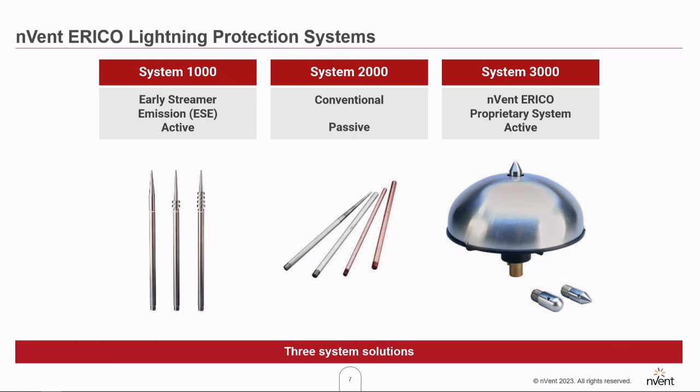Going further, I think I will start with system 2000, because this is the basic installation for lightning protection. It's the installation that we can see all over the world. Everywhere we can see buildings with air terminals on every corner of the building, with down conductors that are going down across the walls.

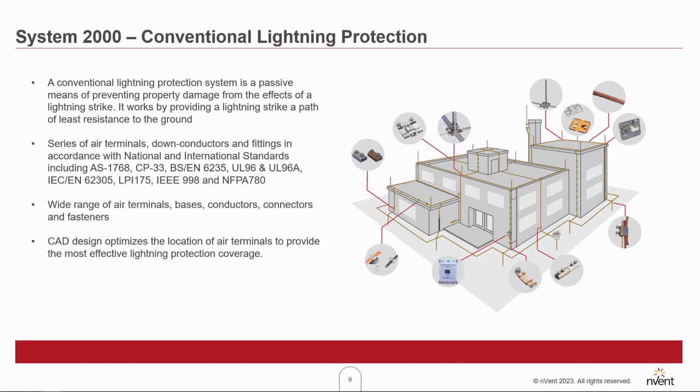Connected in a network, in a raster, and when the lightning strikes, the energy will flow the path that is the shortest to the earth. It's a system that is according to a lot of international standards, and like I said, you can find it all over the world. But it's also, for me as a product manager, the system that gives me the most headaches, because the fact that it applies to so many standards means that in a lot of countries, besides the IEC standard, for example, to keep close to home, there are other local standards.

But we are managing, and we have, especially for Europe, a very broad range of products that are suitable for the markets. And my job as a product manager, and I started with that 2 years ago, is to get for every region and every country, or maybe in every area where they have a specific habit, to create the best solution.

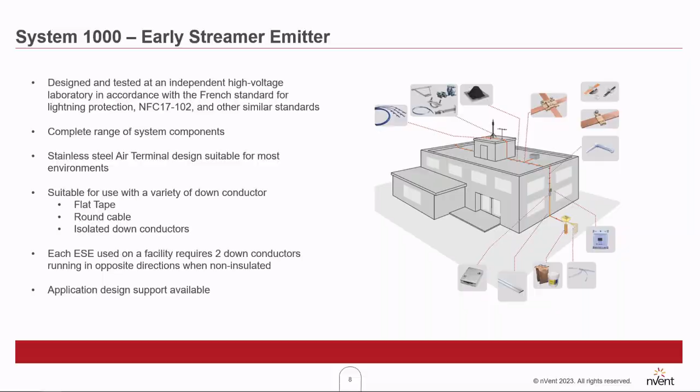The big advantage of this system is that you only need 2 down conductors. Like you see on the picture, on top of the roof there is 1 terminal, and there are going 2 down conductors to every side, with all the equipment that is needed to fix all this equipment. Since this is a bit of a typical solution, we have specific software that I will come back to later, to use to make the right design, and to design the installation, and to pick the right spots where to put these terminals.

Then System 3000. Like I said, this is a proprietary system, an nVent solution, and it's the most advanced solution. The biggest advantage is that you only need 1 air terminal, and it's quite a specific one - I will show you later on. 1 air terminal, and also 1 down conductor.

A specific cable that is developed for nVent specifically. It's an isolated low impedance cable. It's a little bit thicker than a normal cable, but it can be used in combination with our air terminals. And we are using the collection volume method to design the installation that I will show you later on.

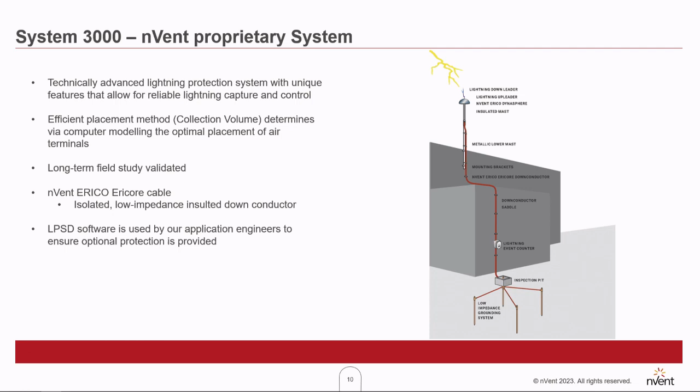Going a bit more in depth with the primary components. There we have, you can see in the middle, this beautiful specific air terminal. And look at that, the cable. If you want, I can pass them around so that everybody can feel and touch the Ericore cable.

So this air terminal, the Dynasphere, is specifically designed for this system, and has a tip, the point you can see on top of it, that can be replaced and exchanged depending on the installation, mainly based on the height of the building. Up to 20 meters we have one, above 20 meters another, and above 50 meters another. System 3000 is specifically interesting for high-rise buildings and specific structures, but we'll see that later on.

And then we have the Ericore cable. If you see it for the first time, it's a strange kind of cable. It consists of a layer, a 50 square millimeter layer of copper, as written in the standard, through which the current goes down. We also have some stress layers around it, because if a complete lightning strike needs to be absorbed, you need a very strong cable. Otherwise, after one lightning strike, your complete installation is destroyed.

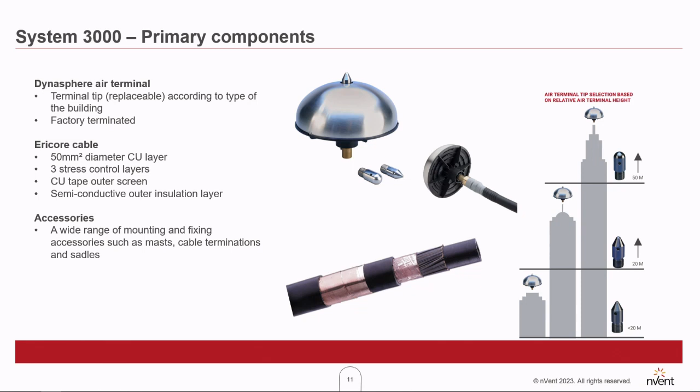The advantage of this isolated cable is also that it can be installed inside of the building. So if you have a nice looking building designed by some kind of designer, and they don't like to have all these cables on the outside, in that case you can put this cable inside, in a lift shaft or something like that.

Another aspect of this cable is that it has an upper termination that is factory equipped. So if you order the cable, you can order it by meter, and it will be factory terminated, so that when the installer arrives at the job site, the only thing he needs to do is connect the cable with the Dynasphere, and it's done. Of course, we also have a very large range of all kinds of accessories that go with this cable.

Looking at how it works: in three phases, the electrical field builds up inside of what we call the dome, which is connected via an impedance. When the electrical field is not that big, it goes through the cable to earth. At one point, as the electrical field keeps rising, there will be an arc in the air gap, which results in an upward leader that you can see here. So it's sending out an upward leader. Here comes the downward leader, and they meet each other. I'll show some pictures later on.

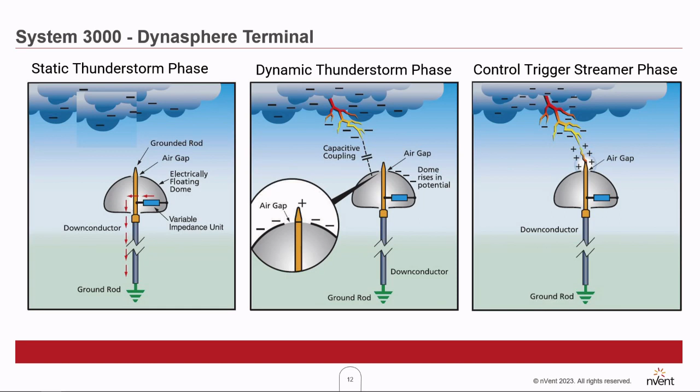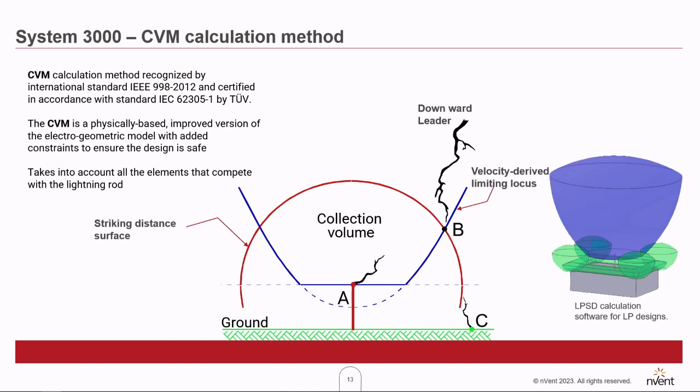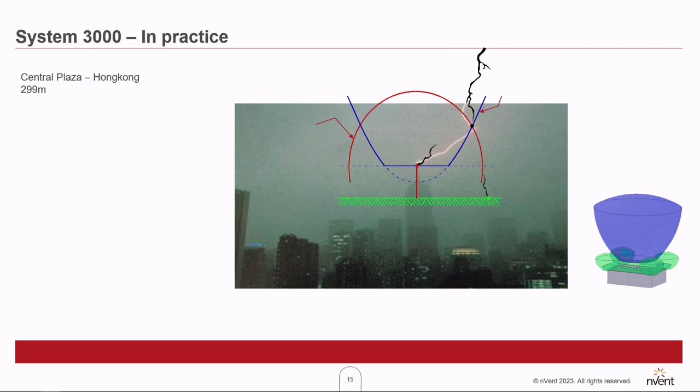In our software it looks like this, and in practice it looks like this. You see here the downward leader, it arrives at the striking distance, and then the upward leader meets the downward leader, and it goes through the Ericore cable down to earth into the grounding system. This is an example of an installation we installed in Hong Kong, an area where we have a lot of lightning strikes.

Going one slide back, this is an example of our LPSD 4.0 software that we use to design the installations. We make use of Revit and SketchUp 3D models to make a complete design. This software is available for everybody who wants to make designs, and we also give trainings to work with it. We also have a service in our office in Tilburg, in the Netherlands, where we offer to make these designs.

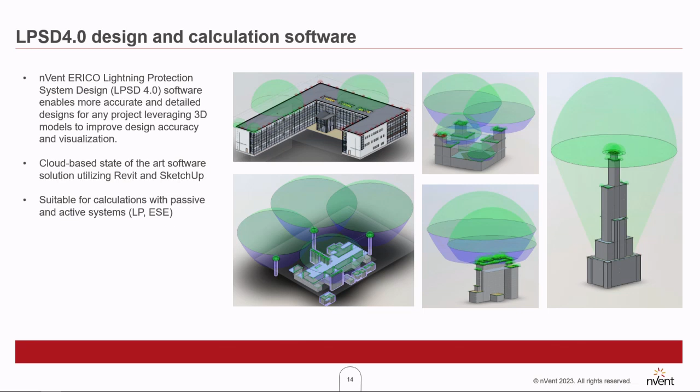Well, since this is a system that is a little bit different than what we know, we've made some studies. We have done extensive studies in the eastern area, in Malaysia and Hong Kong, together with the TÜV. And the conclusion of the TÜV was that the CVM method was working, and it is a system, a method, that can be used in the IEC standards.

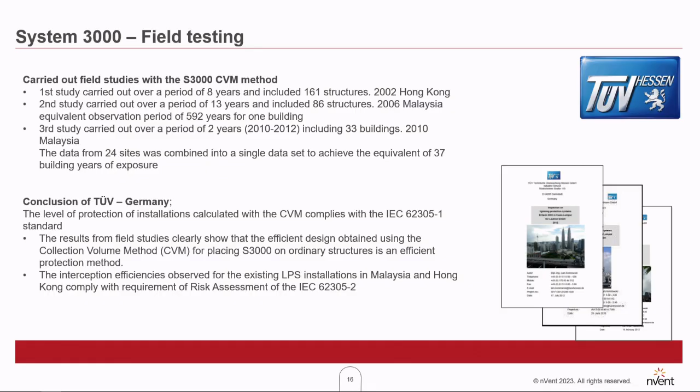So a little recap. System 3000: a very high striking interception efficiency, up to 99%, depending on the protection level. A large covering area, meaning there are a lot of applications where we can use System 3000, but it is mainly interesting for high-rise buildings and typical structures. The installation can withstand multiple lightning strikes.

I have some nice examples later on. And it's, of course, easy to maintain. It's one air terminal, one down conductor. How easy can it be? Easy to install. Like I said, a single cable down to the earth that can also be installed inside of the building.

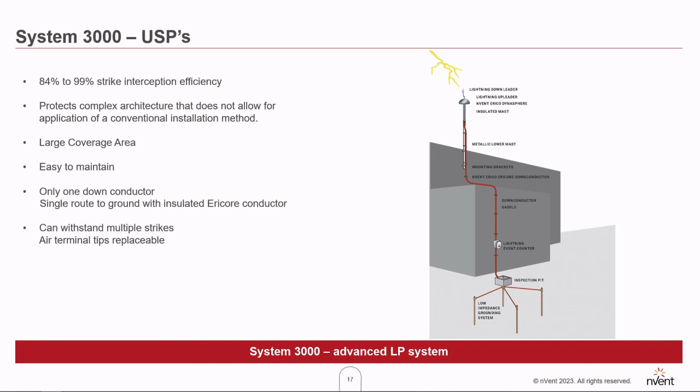A nice example of a System 3000 installation is here in Mexico. This is one of the biggest telescopes in the world, at least it was at that time. Here we use the System 3000. You can see the air terminal here.

The nice thing to see is this is the number of lightning strikes. I don't know if you can read it, but it says 598, so almost 600 lightning strikes. And this is a picture of how the Dynasphere looked after these kind of events. As you can see, the telescope is still up and running.

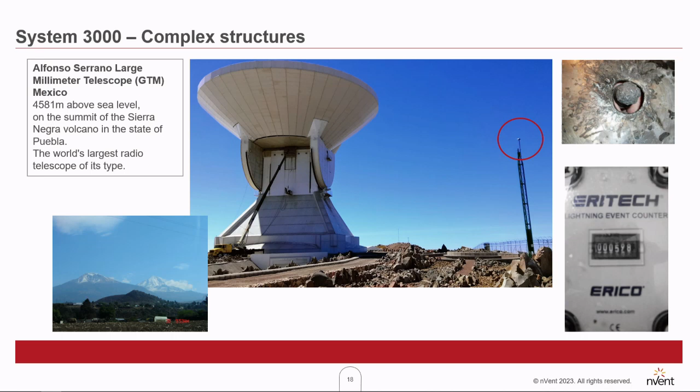Here's an example of System 3000 in a complex structure. It's a power plant in the US. And you can see that with only 4 Dynasphere air terminals, we can protect the complete installation.

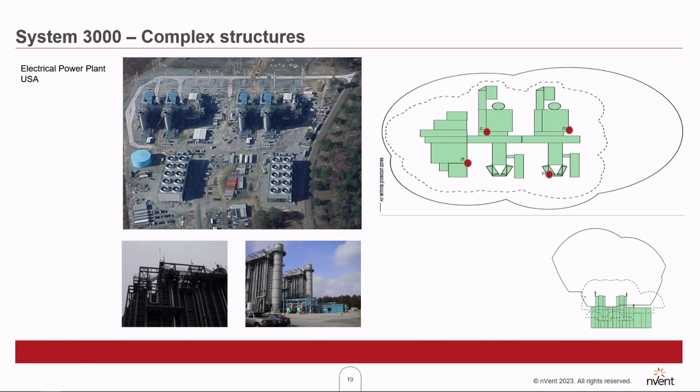Other complex structures: on the left side, you can see a very nice-looking building in Switzerland, and the architect didn't want to have cables on the side of the building, so we used their System 3000 to protect the facility.

Other projects are the university in Jeddah, a little bit closer to home the Warner Bros. Entertainment Park, the Porsche Museum in Stuttgart - a very nice project for ERICO to show what we can do - and in Poland, the shopping center.

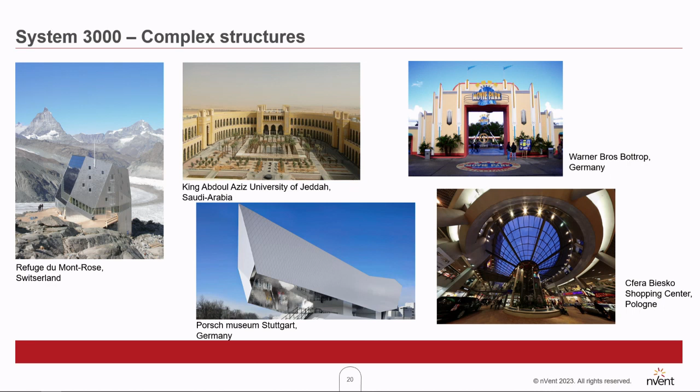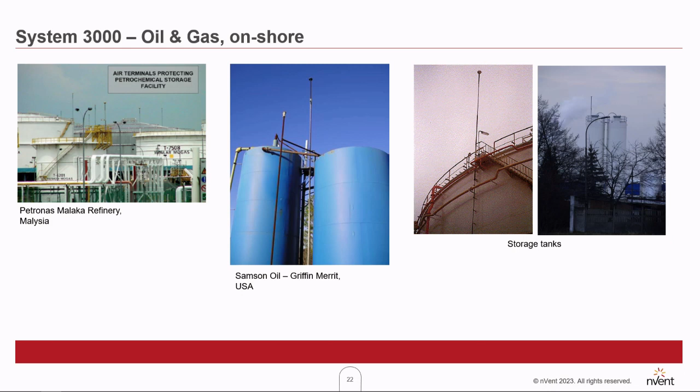Oil and gas - for storage tanks, but also for refineries. And offshore for oil platforms. You can imagine that this is a very difficult structure to protect completely at the sea.

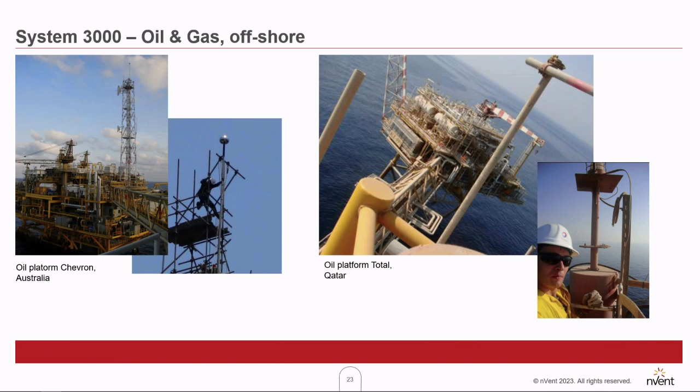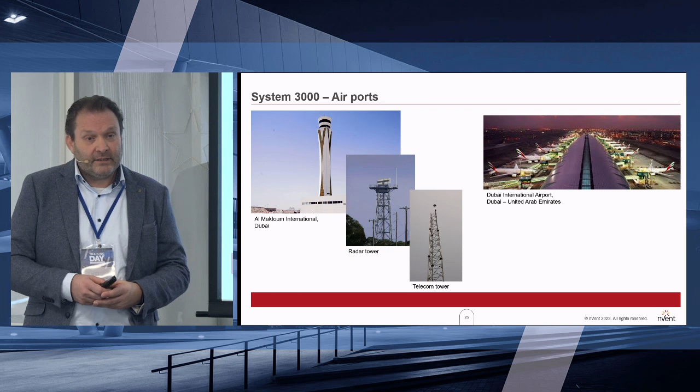So, conclusion: nVent ERICO, specialist in grounding, bonding and lightning protection. And due to our strong expertise in this field, also with our System 3000, we are one of the leaders in protecting installations - all kinds of installations, so to say.